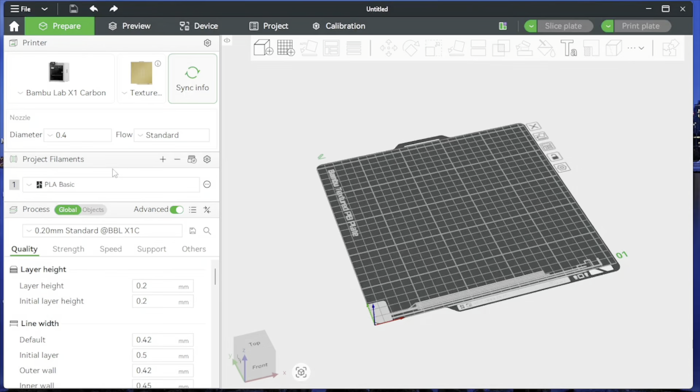All right, we've got Bambu Lab open. Let's go File, Import, Import 3MF, and then we're going to go over. This is more than likely the one we just exported. Yeah, so we should have about 11 parts in there.

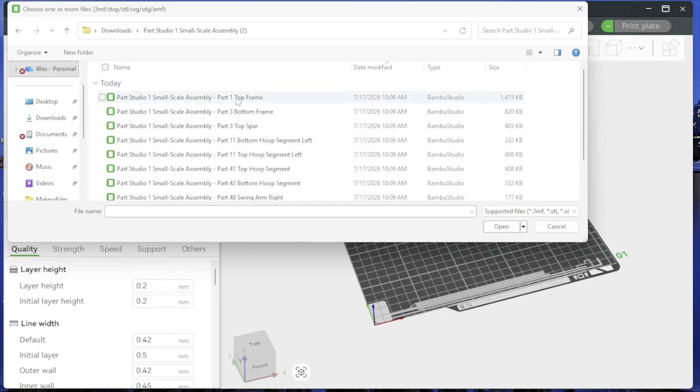We're going to go to this top frame, open, left click on it, and then go up to scale. We're going to go 33.33, and that'll scale the X, Y, and Z. It's going to be the top part of our frame. Then we will left click on it again, go over here to rotate, right here, rotate.

Let's scroll down and let's rotate that around and get it fairly square to the edge. Left click on the build plate again, left click on this, and you can move it into position. So I'm just holding down the left button when I'm on the build plate to move it around here. And if you right click, it moves the build plate this direction, and then the wheel will scroll you in. So you can scroll in and out.

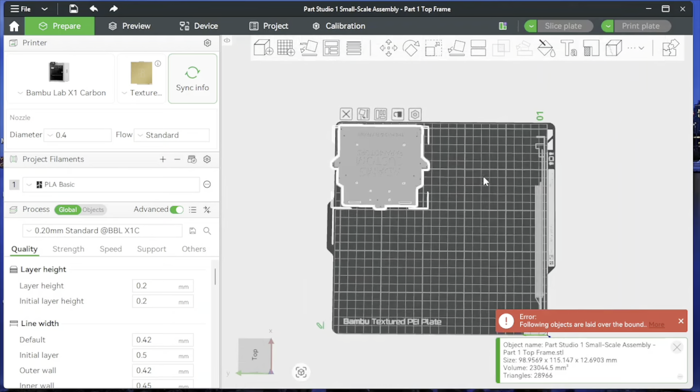All right, so that looks good. Don't worry about the error message right now. We'll worry about that once we get it. What it's telling us is this part was hanging over. So we'll just want to move it to the inside.

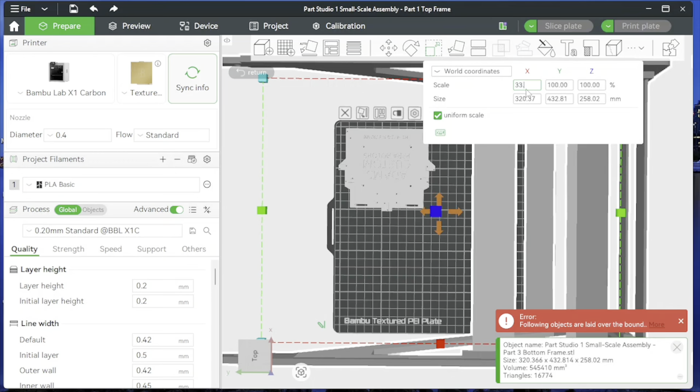All right, let's go File, Import. And let's go down and find the lower part, bottom frame right there. Open, left click on it, come over to scale, and again 33.33, bring it down, and let's see, let's come over here to where it says lay on face, left click on that orientation, then left click and move that around. Let's see where we can move that.

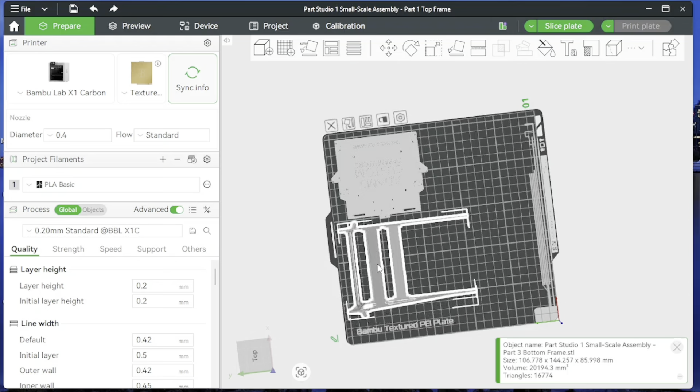That looks good. And I think we'll be fine with the supports where they're at. We have to put them on. So supports, anything that kind of overhangs, we'll have to put supports in so that this PLA has something to print on.

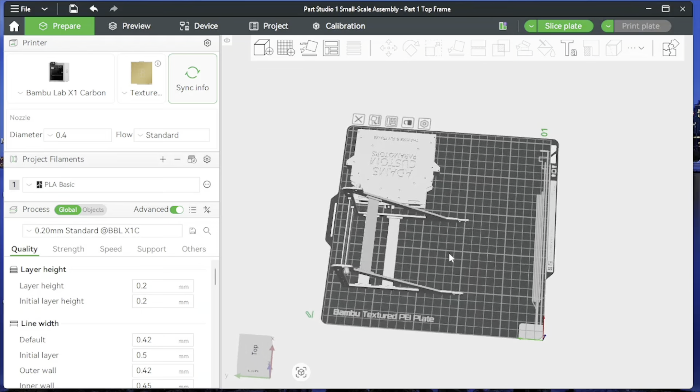So greater than certain angles, I think it may be 45 degrees. It could be less than that, maybe 30. But anything with an angle.

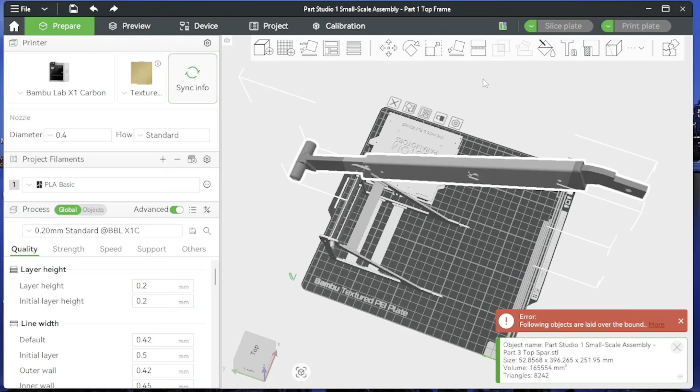Now let's go File, Import. Let's do top spar. And we could do just this top spar if we wanted to, but let's go ahead and print them all. Scale 33.33.

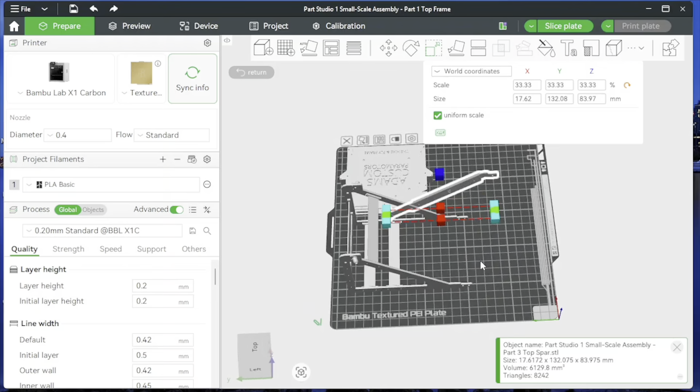All right, that did not scale. Let's go back and do it again. 33.33, left click so it scales. And let's find the best orientation to print that in.

Let's go lay on face. And we can do the same thing on this and print it. It just costs you more PLA to do that, but you can get more things on the build plate because you can't stack things on top. So if we go tall on most of our parts, we can get more things on one build.

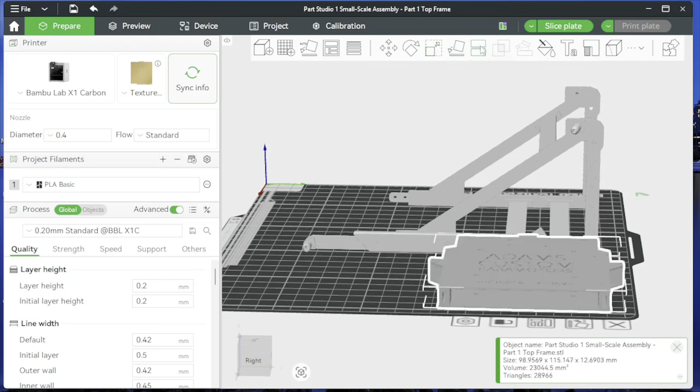Let's go lay on face here, lay on face. And let's bring it up here like that. There we go. And now we can move that to the edge. I'll scroll out and look at that. And we may do the same thing with this.

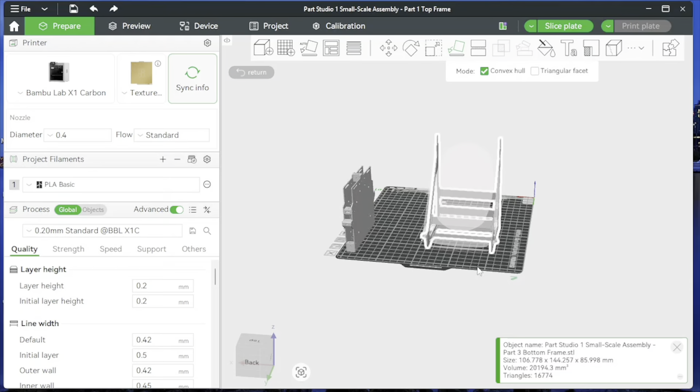Let's go lay on face. Let's move it to there. Let's move that to a place where we'll have an angle. So what I'm trying to do is give us something pretty long through there. So if we have a long part, we can put it there.

And let's move this around and see if we can get it somewhere. So we could left click on it and then clone it, and then we wouldn't have to bring it in and scale it each time.

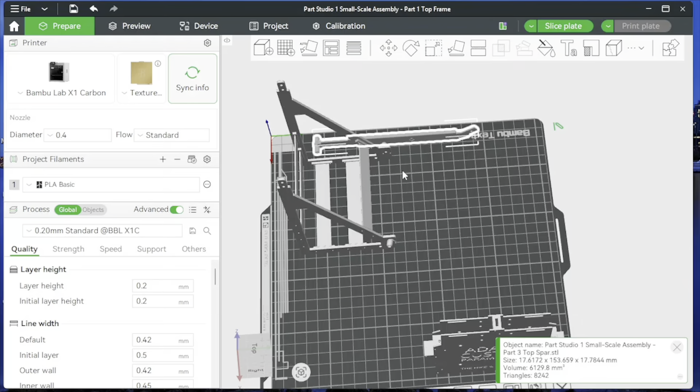And I may do that clone just to give us some practice at it. Let's do 2 of those, so it's going to bring those apart. Let's rotate this one. It's kind of like playing Tetris - we're trying to fit things in here as best we can.

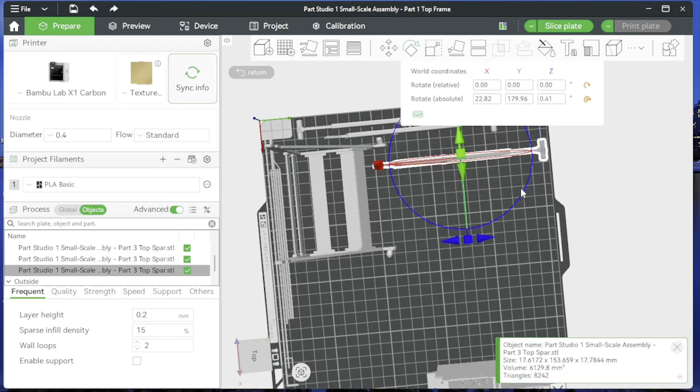Let's move this over. Let's move this in closer to it and see if I can't move it a little closer. Left click on that and then drag that.

We did the other ones, so let's go File, Import. So we did our spars. Let's do our bottom hoop segments - these are going to be some of our longer parts.

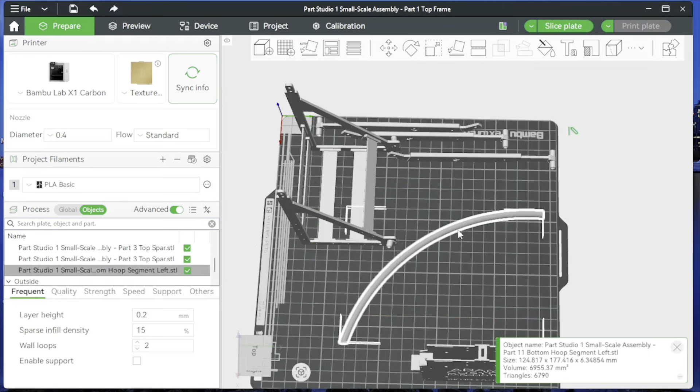Left click on that and then go to Scale, 33.33. All right, and I'm going to rotate that and see if I can't get it to fit right in there somewhere.

We'll see. Now left click on that and clone, because we need one more. Let's go File, Import.

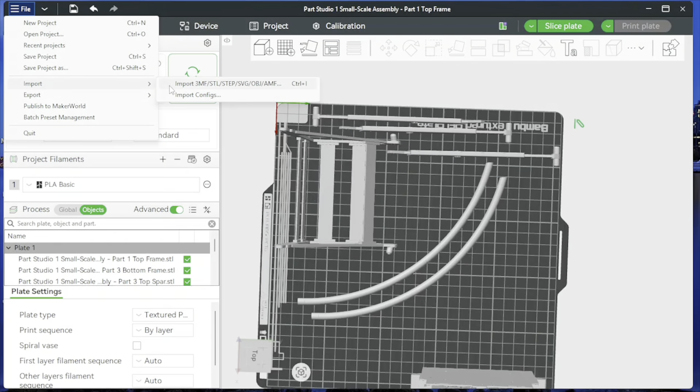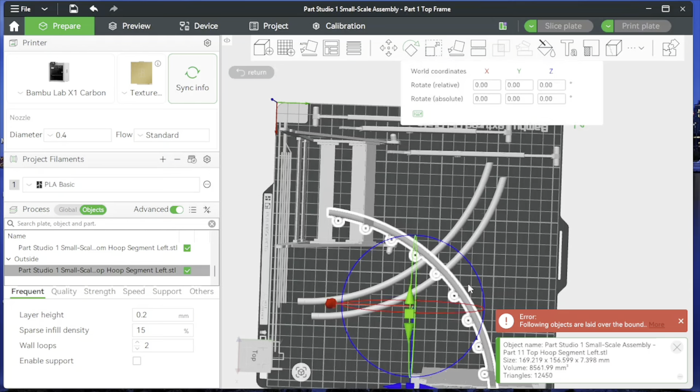Let's do our top hoop segment, and it doesn't matter if it's left or right. Left click on that, let's go Scale. Green check mark. Let's rotate it. Click the blue here, and let's rotate that around.

Let's clone that, because they are the same length, or should be. All right, so we got those in there. File, Import.

So we did both of these up here. We just did the right. Let's see if we can fit a swing arm in there.

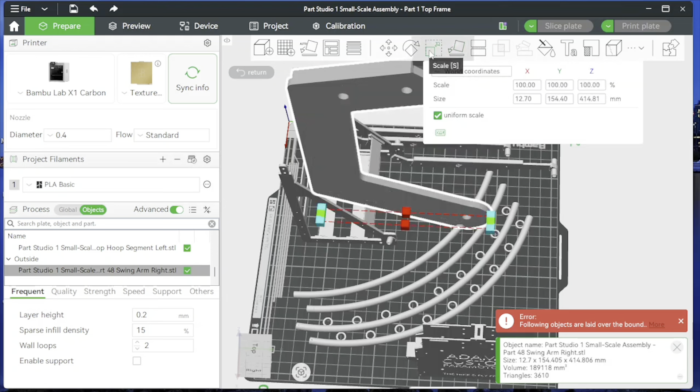Open. Left click. And let's go to Scale, 33.33. Green check mark. I think I can.

Even if I want to lay it down flat, I believe we could do that. I mean, we could leave it like this if we wanted to and have it print in that direction, just to have it fit, because these would be super tall, but this would be easier to stand up on its own. So let's do that.

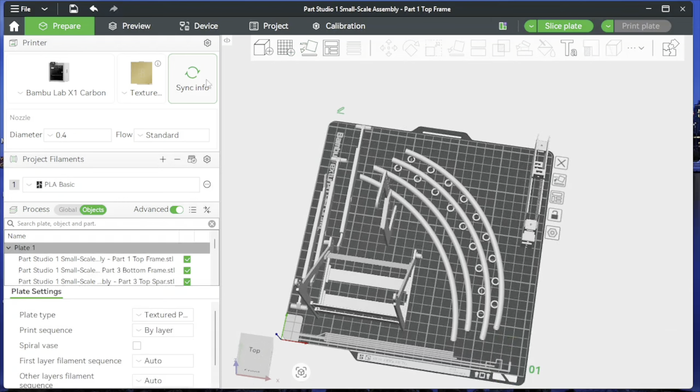Left click on that and let's go lay on face. Let's have it fit like that, and we'll see if we can move it. Let's rotate it.

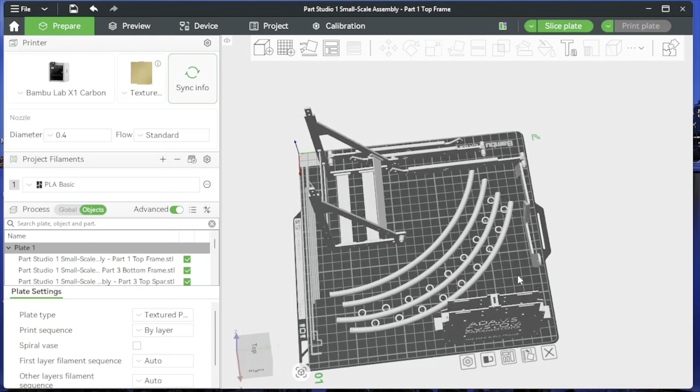And let's move it over here somewhere. Might even be able to fit it in between those if we had to. Let's go clone, because it doesn't matter if we have left or right on this.

Those look good, and I think they're far enough away where they're not touching. No, we're good there. We'll go Preview, and it's going to go through and make sure everything checks out.

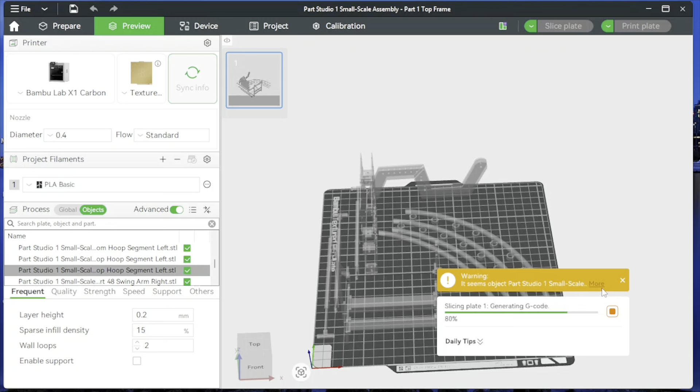So we've got a warning here. I know what we didn't do. So let's go back to Prepare, and that's why you'll run your preview. Let's go to Supports right here. Let's go to Enable Supports, because all these have hollow structures, especially these that need something to support them.

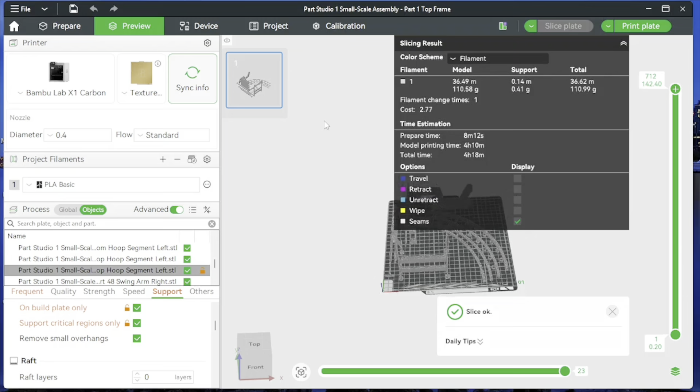Preview it. You can see our printer that we're using is selected up here. We're using a textured plate. And I have something currently in the printer, but I'm going to go ahead and go to what the next step would be. It'll tell us that it's busy. Print plate - so we've got something going on right now.

When it finishes up, which it'll finish up in about 20 minutes, we'll select here, we'll find what filament we want to use, and then we'll print it off.

All right, and this is what the 3D print looks like. So we just printed it in black PLA, and we assembled it and made sure everything went together the way we intended. The way I had those supports set up, you'll notice that there is a mistake right here.

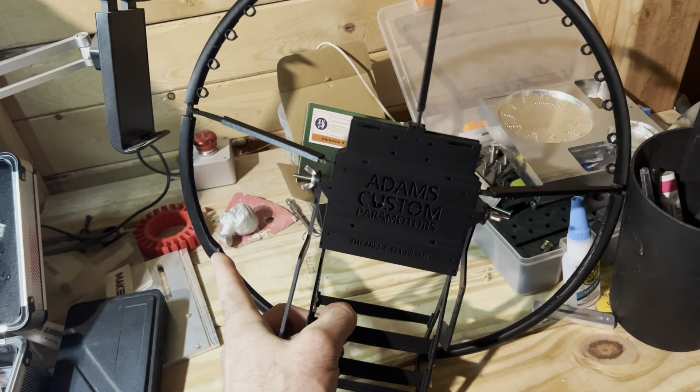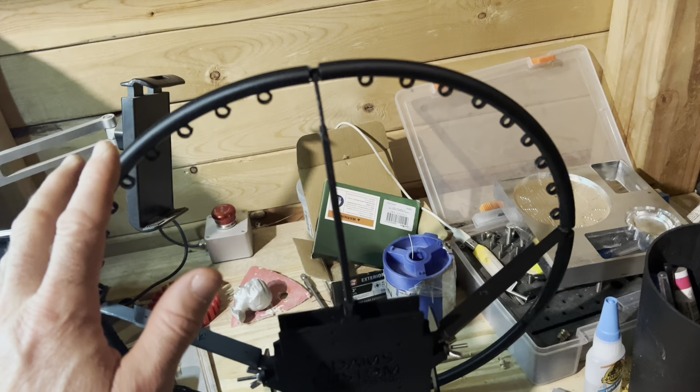So I repositioned these, and I actually took the hoop segments - they ended up printing better if I laid them down flat. And so that's how I had it in the video, but I eventually turned them up on their edge and made them taller, thinking that would allow a better print. But for this thicker print material, these did better when they were laying down flat like you saw in the video.

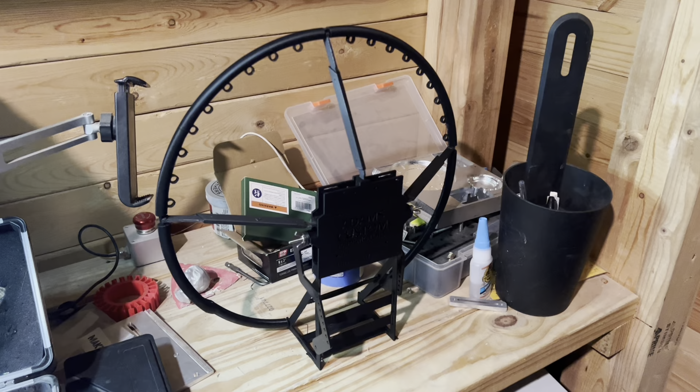In terms of material cost, if we make a mistake here, it's way cheaper to correct - we would be less than $1 for most of these parts. And then once we go to full scale, we don't want any mistakes because that could be extremely costly, especially with aluminum. If you're buying $400 worth of aluminum to create this frame, any mistake could cost you 30, 40 bucks, maybe even more sometimes.